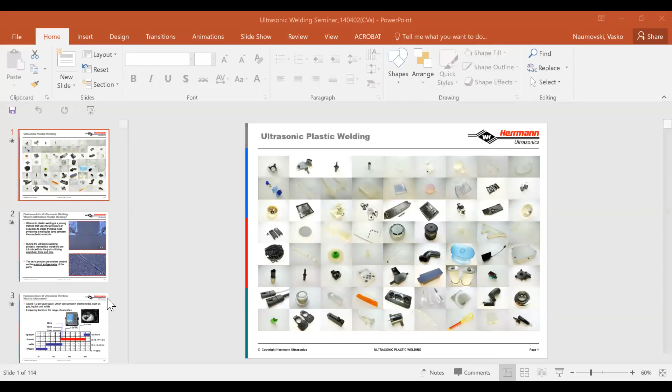As Ray mentioned, the newest division for Herrmann Ultrasonics is welding of metals, capitalizing on the trend we see in electric vehicles. We've introduced equipment that borrows the heart of our system, the generators and converters, the proven technology we have, and applied it to ultrasonic metal welding of the anodes and cathodes, the foils within a lithium-ion battery, or the battery management system, the high voltage cables that supply the motors in an electric vehicle.

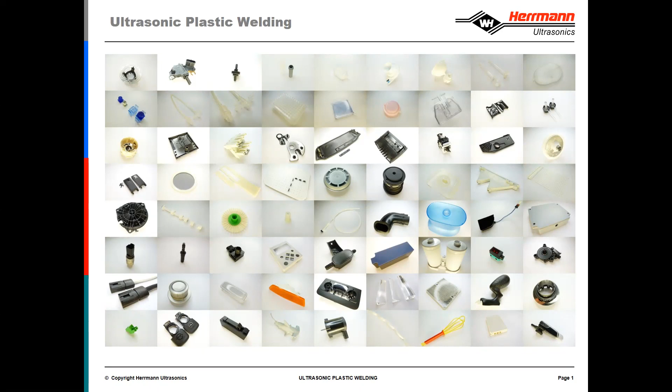As Ray said, that's kind of my job by day, and my job by night is mentoring some of the newer salespeople, traveling with them, viewing new applications, but also doing things like this customer outreach, where hopefully we can give you some additional information to make your lives and your jobs a little bit easier.

So this is the introductory class. This is a 1 hour segment of something that we typically do that lasts a full day. That class is typically held either at our headquarters in Bartlett or in one of our field office locations. We do have a lab in Lowell, Massachusetts with a machine there, so we've held this class there. The difference is that it's quite a bit more condensed, and it's divided up into 2 segments.

So this segment is the basics class. We'll be talking a little bit about the machine, a little bit about how the process works, what are some of the components, those kind of things. So let's jump right in, and I'll give you some definitions here.

Basically, the ultrasonic plastic welding process is a joining method that uses the principles of acoustics to create frictional heat, producing a molecular bond between thermoplastic parts. So down at the polymer level, at the molecular level, what we're looking to do is excite those polymer chains, break those polymer chains as the material melts, and then have them relink and rebond together with the other part so that it's an imperceivable joint that is seen.

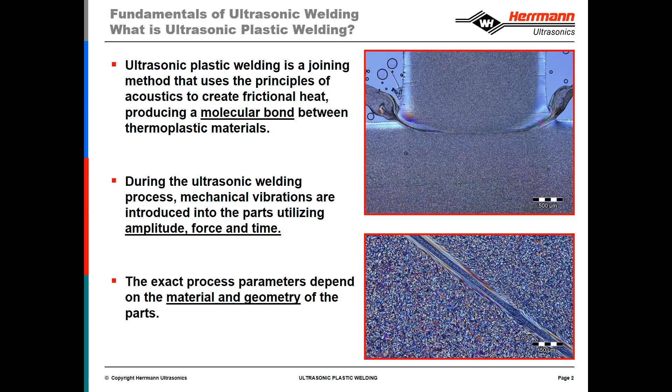And the exact process parameters depend on the material and the geometry of the parts. Larger parts typically take longer to weld, and depending on the material being welded, whether it's amorphous or semi-crystalline, or whether it's ABS or polypropylene, the type and amount of amplitude used is adjusted, again based on those 3 levers or knobs of amplitude, force, and time.

So sound is a pressure wave which can spread in elastic media such as gas, liquids, and solids. These are the frequency bands in the range of acoustics. We use 3 different frequencies: 20 kilohertz, 30 kilohertz, and 35 kilohertz.

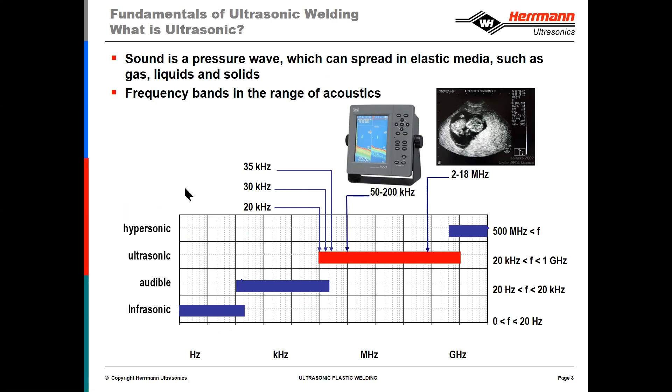But this slide also shows that the technology behind ultrasonics is used in a variety of different things. Anybody that has seen a sonogram of a child developing and his mother can relate to this. Bats use ultrasound to kind of hunt and find their prey. So it happens in nature, it happens in industry. There's a lot of different uses for ultrasonics.

There are basically two different ways of propagating a wave: it can either be transverse or longitudinal. An example of a transverse wave is if you drop a pebble into a pool or lake, you see the ripples undulate up and down and spread out, where the direction of propagation is perpendicular to the rock falling into the pool.

A longitudinal wave, on the other hand, has the direction of propagation and the direction of vibration coincide. An example is a sound wave. So when we create a longitudinal wave in the stack, the vibration is up and down. The stack, as applied to your plastic parts, acts like a mini jackhammer. It's not scrubbing the parts - it's as if you were clapping your hands. The effect produced is a micro jackhammer against those plastic parts.

As we've discussed, sound waves are mechanical longitudinal waves, and we split them up into lambda, or wavelengths. As the frequency goes up, the wavelength of sound traveling through titanium, our chosen material for the stack, goes down. So 35 kilohertz tools are shorter by nature than 20 kilohertz tools.

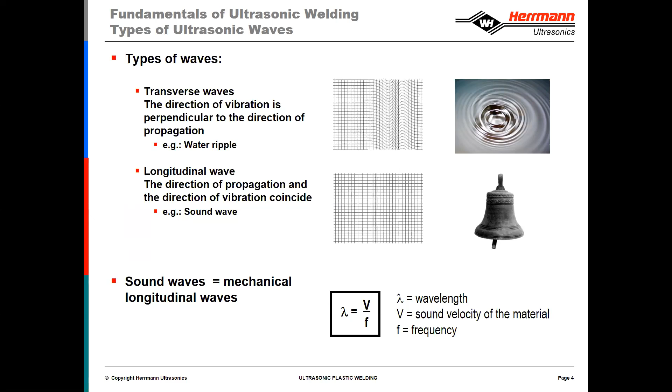So this micro jackhammering effect that we see, how big is it? A human hair is about 100 microns in diameter, and the typical amplitude we see - and I'd like to point out here it's zero to peak, so at rest to its maximum excursion - we typically see something in the range of 30 microns. It can be as high as 50 microns, but again we're talking about one third to one half the thickness of a human hair, so it's a very, very small amount of movement. It's vibrating 20,000, 30,000, or 35,000 times - very fast movements, but very small movements.

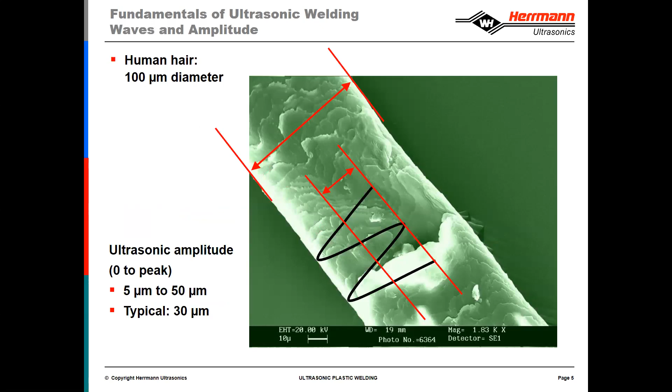So some additional definitions here. Amplitude is the zero to peak excursion of the Sonotrode face while in expansion. The Sonotrode contracts and expands, contracts and expands, so the amplitude we're measuring is from zero to peak. The definition of frequency is the number of cycles per unit of time - every time you see that excursion of peak to peak, that is the definition of frequency. So one hertz is one cycle per second.

In the case of 20 kilohertz, it's 20,000 cycles per second. Each of the components in the stack has what's known as a nodal point. So when it changes from rest to minimum excursion, to expansion, and back to contraction, it has to go back through that zero point.

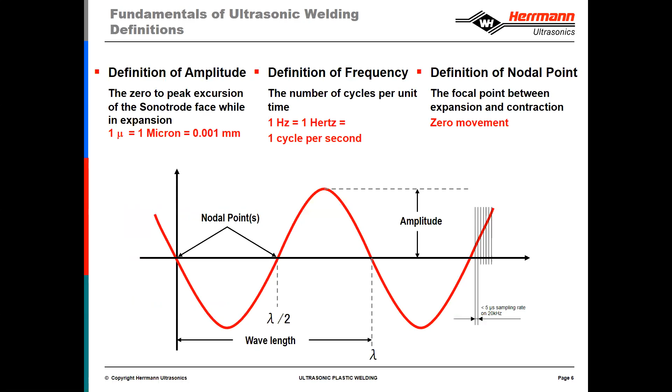So if I were to hold a rubber band between my fingers at the two ends and stretch it, you could hold the middle of the rubber band - that's the nodal point. That's where we mount the stack: hold the booster, hold the converter, and at times, if we need to, hold the Sonotrode. At the nodal point is where there's zero movement, and that's why we can hold and mount that tool within the actuator.

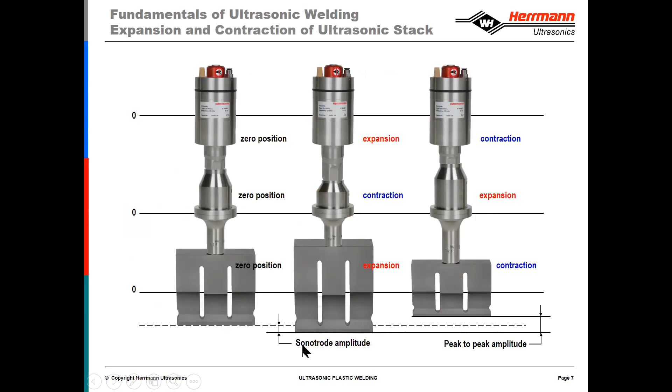Here's a graphical representation of the stack: we have the converter, the booster, and the Sonotrode, and the nodal points are here. As you can see, when it goes through this expansion and contraction cycle, it switches back and forth - in the case of 20 kilohertz, 20,000 times per second. When the Sonotrode is in expansion mode, the booster is in contraction mode, and the converter is in expansion mode - each component changes state from expansion to contraction. So although there is this peak to peak amplitude, in the contraction mode it's somewhat theoretical - we don't measure that. We only measure Sonotrode amplitude from zero to peak.

This is a pictorial representation of the welding cycle. We have our two parts, loaded into the fixture. The Sonotrode, stack, and actuator move down and make contact with the part. Typically there's a trigger force that you program based on the size of the part. Once the parts are squeezed together or loaded up with force, and the trigger happens, we start to vibrate. When we start to vibrate, this sacrificial bead - what we refer to as the energy director - begins to melt.

The actuator continues to push with a pre-programmed weld force, for some amount of time, distance, or energy and/or power. That's programmed in, and when that primary weld parameter is met, ultrasound turns off, and the welder switches to a hold time and corresponding hold force, which can also be profiled. At that point, the plastic is still molten. We continue to press until the plastic cools in the joint, then the Sonotrode moves up and you remove the welded part.

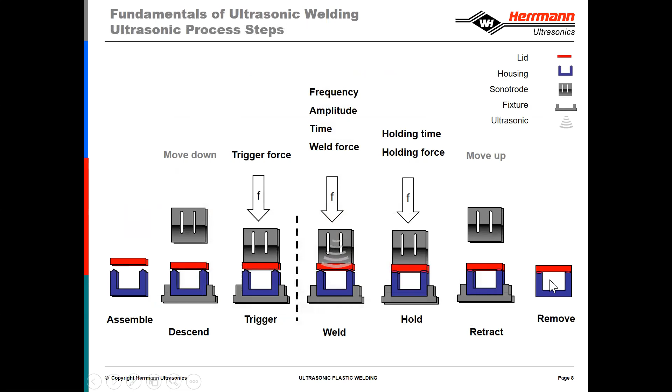This is a video of a luer fitting, a typical application that we weld. Before starting, note there's a gap here between the two parts. The upper part is the driven part, and the lower part, in the fixture, should remain motionless. The weld bead is approximately in this area.

What you'll see is a full speed cycle. The Sonotrode comes down, loads onto the parts, vibrates for a very short amount of time, 2 or 3 tenths of a second. Then you'll see a wetting of the area where the weld bead, energy director, or shear design is within the part—you'll see that melt, bond, and the Sonotrode retract.

So there's a full speed video, and then there'll be a video at half speed as well.

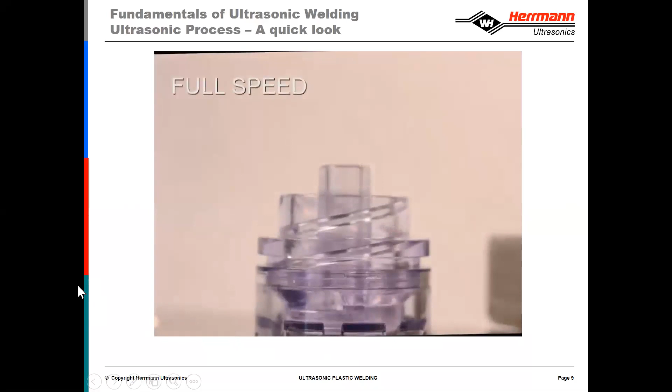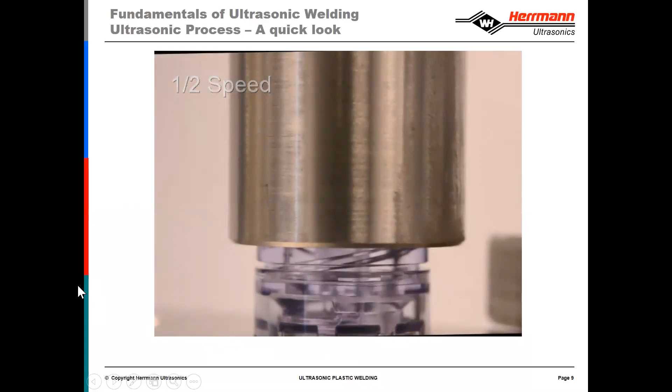There are various inputs and outputs into the machine. The main inputs in the startup phase are choosing the frequency to use, which is typically driven by the size of the part—larger parts use lower frequency, smaller parts use higher frequency. Then we choose the amplitude based upon the material being welded and the weld part design.

When we move to the next phase of setup, we have to adjust and align the tooling, and make sure the parts are manufactured consistently. Part-to-part and cavity-to-cavity variations can affect the setup. Then our input welding parameters—are we going to weld by collapse, by energy, or by an RPN? Then we weld the parts and get an output.

Typically there's a graph of weld process data, and we can do quality control on the welded part—a pull test, a leak test, whatever it might be—to determine if the part meets requirements. If it doesn't, we go back to our setup or input weld parameters and make adjustments to determine the exact recipe for the best part possible.

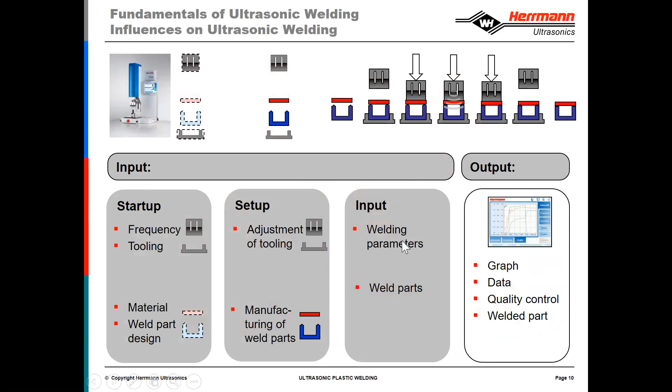We're aided by this data and graph, which has a joining velocity curve. That's our key guidance, our navigation system, that tells us what to adjust. We typically look for a linear joining velocity, and we adjust the weld parameters to influence that joining velocity curve so that it is linear.

Here's another video I'd like to show, using a high-speed camera that takes thousands of frames, 1,000 pictures per second. Here we have an energy director—this is the driven part, and this is the stationary part in the fixture. Because it's so high resolution and zoomed in, you'll actually see this part vibrate.

As it's vibrating, you'll see the energy director melt and the molten material flow. This is not an ideal weld joint design—there's no flash containment, so you'll see the flash get stringy and start to flow out here. I just wanted to show how the process looks at a microscopic level.

That energy director is essentially a sacrificial bead, as I call it. It's molded and designed into the plastic part, so that as the parts melt and collapse and come together, the final finished height of the part should be taken into consideration after the energy director is fully consumed.

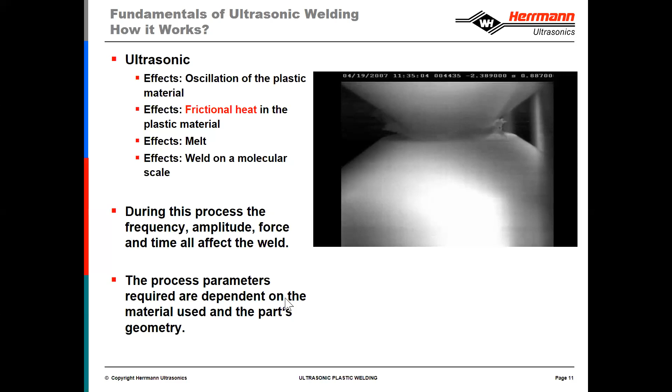It's important for us to get the right amount of heat into the plastic parts. If we don't have enough heat, we may still melt the energy director, and the parts may stick, but there's really not a homogeneous weld.

Initially, the crystallized solid part, as you heat it up, those molecules start to move around, get excited, the polymer chains break, and if they cool before we've reached the melting temperature of the materials again, you might get some sticking of the parts together, but there's not a true homogeneous mixing of the melt.

When we have the proper amplitude or proper heat that we introduce into the parts, we get this intermixing or molecular exchange of molecules between the parts, and therefore we get a true homogeneous bond.

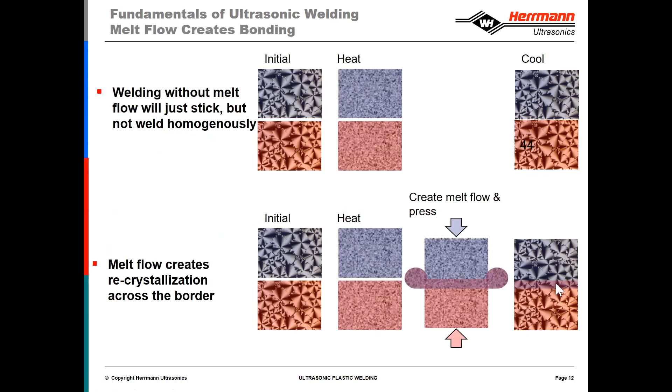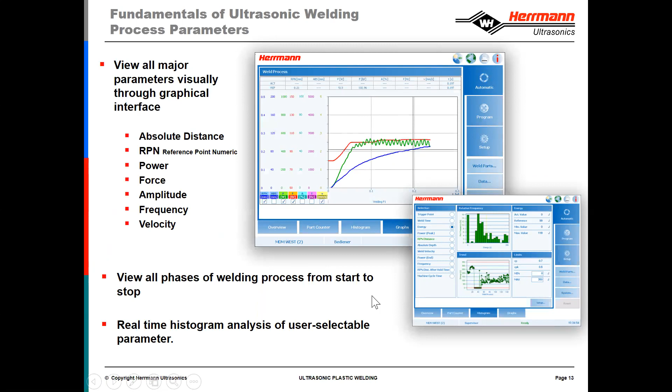We also have some quality control things that we can look at statistically to see how in control the process is.

So if you're making tens of thousands, hundreds of thousands, or millions of parts per year, we typically recommend a piece of automation be used for that application.

We have some applications where, in automation, the actuator is actually cam driven, and we've had cycles of up to 60 parts per minute. So again, depending on the volume of parts intended to be produced in a given amount of time—day, month, year, whatever it might be—take into consideration whether you need a manual workstation or whether you need to automate that process.

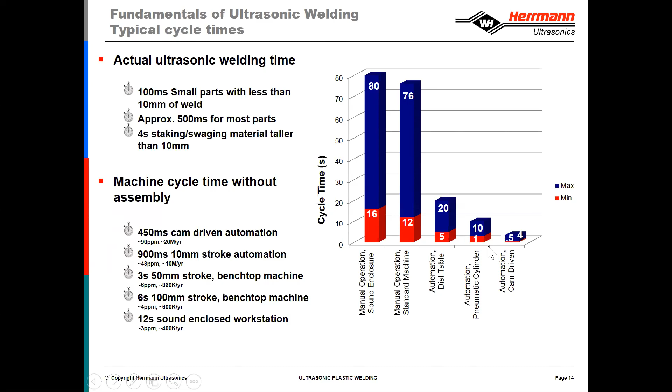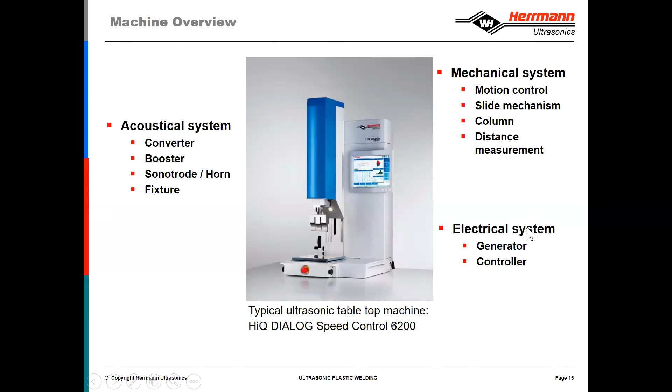Now we'll get into the subsystems within the welder. This is a picture of a benchtop machine. But whether it's a benchtop machine or an automated machine, the subsystems—the acoustical system, the mechanical system, the electrical system—are pretty much the same.

So in the acoustical subsystem, again, we have the stack, and I've been concentrating on that because that's really the most important component. So the converter, as its name implies, converts electrical energy into a mechanical vibration, and we'll get into the specifics there in just a little bit.

The booster amplifies that mechanical vibration, and then the Sonotrode is custom to the application, and then that makes contact with the plastic parts. The analogy we like to use is the drivetrain in your car. The engine is the converter, just like the engine in your car takes air and fuel and spark and creates torque or a rotational movement.

The converter, again, takes electrical energy and converts it to a mechanical vibration. Analogous to the transmission, the booster has different ratios or different gears, if you will, depending on the material that is chosen. So just like in your car, a specific gear is used for a specific speed. A booster or different ratio of boosters is used to amplify the mechanical vibrations.

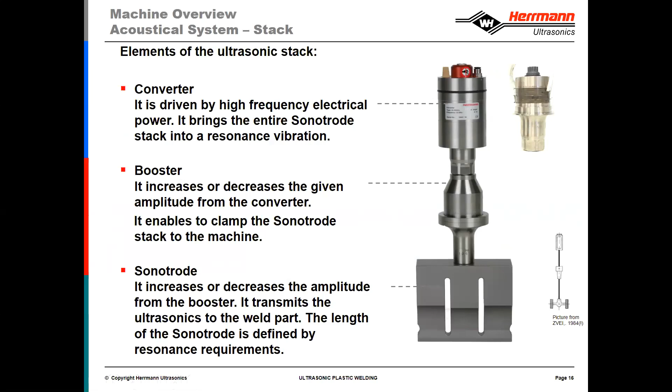And then, as the analogy finalizes, the tires, or where the rubber meets the road, the Sonotrode is custom and has to really grip the part and couple with it. So theoretically, the part and the Sonotrode couple and move together, and then the stationary part, the part that's in the fixture, remains motionless.

So this graphical representation is using our finite element analysis, or our modeling. Obviously, it's greatly slowed down and greatly exaggerated, but you can see this longitudinal vibration. So the direction of propagation, the up and down, this micro jackhammering that we need, is like you were to clap your hands together, not scrub your hands together. We can see the nodal points.

And then we can see that in this case, we're measuring peak to peak, but the output of the converter is 10.5 microns, 21, 22 peak to peak. And then the booster, because of the nature of its design, above the nodal point we have the driving mass, and below the nodal point we have the driven mass. You can see that there's a discrepancy. The driving mass is larger than the driven mass. And so therefore, more amplitude is created at the face than was inputted to the back.

So from 22, we go to 55 microns. It's not visible here, but if we were to turn the Sonotrode 90 degrees, you would see that again, the driving mass above the nodal point is larger than the driven mass below the nodal point. So again, we have a gain ratio. The amount of mass above is larger than the mass below. So therefore, we go from 55 microns of peak-to-peak input to 88 microns of output, or conversely, 44 microns of zero to peak.

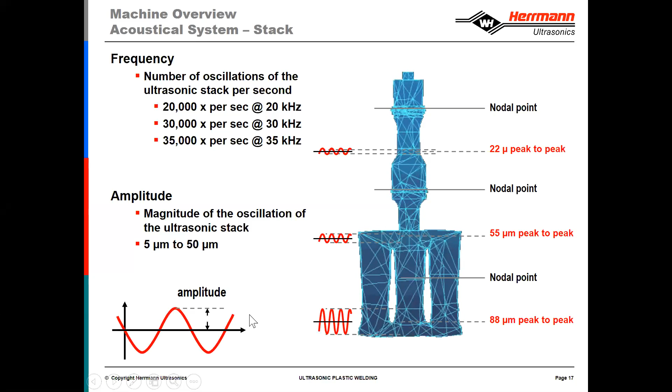So how does the converter generate this mechanical vibration? It uses the piezoelectric effect, and basically the ceramic discs that are in the converters for the converter stack, 20 kilohertz converter, 35 kilohertz converter, but they're essentially the same, piezoelectric ceramics here, with electrical leads coming in. So when we excite them electrically, they expand and contract, they vibrate mechanically.

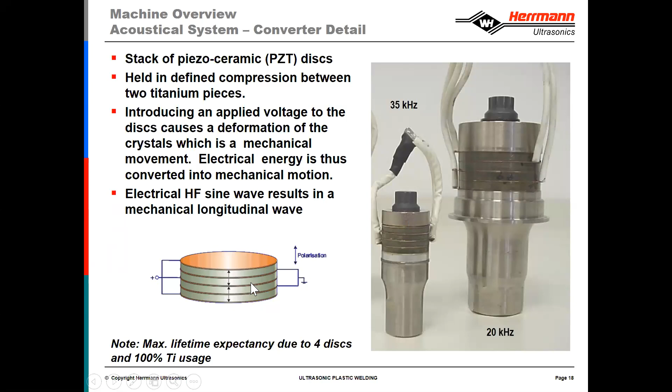So as I mentioned, the booster, by nature of its mass above the nodal point and below the nodal point, creates what we call a gain ratio. So the input vibrations are typically smaller in the back and larger in the front. And each of the boosters has etched into it the ratio. So in this case, this booster, for 1 micron of input, outputs 2.5 microns.

We do from time to time require a reduction in gain, so we see that we have reducing ratio boosters in both 20 and 35 kilohertz, but more often than not, more common is to see increasing gain. So in 20 kilohertz, we have ratios of 1 1/4, 1 1/2, 2, 2 1/2, and 3. In 35 kilohertz, we have ratios of 1 1/4, 1 1/2, 2, and 2 1/2.

In setting up a process for our customers, we are essentially responsible for picking the right booster. The reason we're training or teaching about this is that sometime down the line, you may change your material or something else may change in the process. So how do you get the process back into control, or how do you get the output to meet your requirements? More often than not, it's a change in amplitude that will affect how the parts are welded.

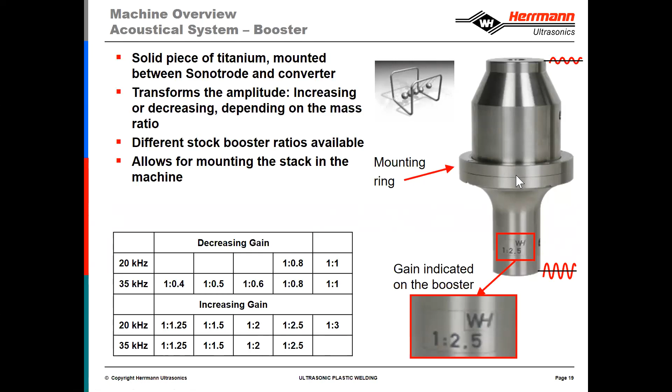Sometimes what happens is if a customer disassembles the stack, or if they have to change applications and remove the Sonotrode to put a different one on, more often than not they don't torque it high enough or well enough. These torque specs are relatively high. For those of you with other machines, you may have experienced putting some sort of anti-seize or a mylar washer between those components. We manufacture our components to a higher flatness and surface specification, so we don't apply any lubricant between the stack components, and we don't place any mylar washers in between. Clean, flat, dry, and torque to a higher specification.

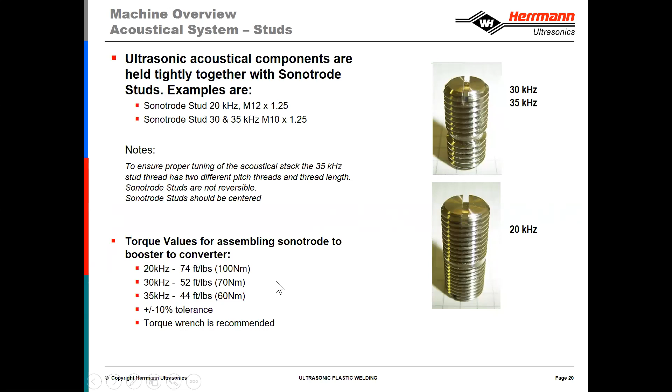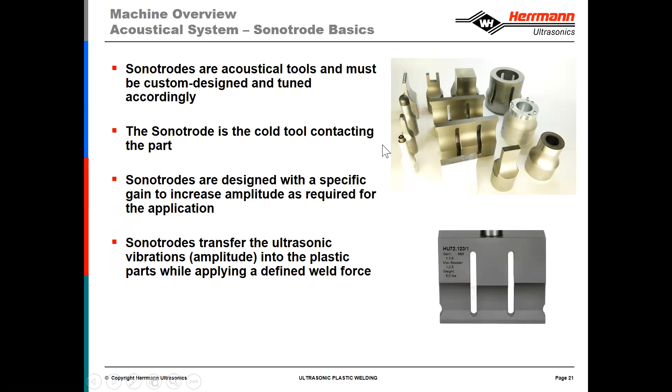A 20 kilohertz Sonotrode is about 5 inches long. So when a Sonotrode becomes wider than it is long, the vibrations don't know whether they're supposed to be going up and down or at an angle, transversely. So these slots are added in very specific locations—very specific in their width, and very specific in the location from the back of the Sonotrode to the front of the Sonotrode. All this goes into the tuning aspect of the tool, because it has to vibrate very precisely at 20 kilohertz. So again, these slots are put into larger Sonotrodes that are wider than they are long.

The different materials we typically use are either titanium, aluminum, or steel. I'd say about 75 to 80% of the tools we make are titanium, and then the other 10% in aluminum and 10% in steel, plus or minus. Titanium has the best mix of strength and elasticity. Aluminum is very soft, so it can have more amplitude or be stretched more than titanium; however, because it's softer, it can wear out faster as well.

On the other end of the equation is CPM steel. If you have a glass-filled nylon, for example, we've seen applications of glass-filled nylon up to as much as 30% glass fill. The glass fill is abrasive, so the tool can wear—the Sonotrode is making contact with that plastic part 20, 30, 35,000 times per second. So just as if you were to beat on something multiple times, it'll deform, it'll wear, it'll change.

So we choose the material of the Sonotrode depending upon the material of the plastic part to be welded. Furthermore, we can add coatings such as hard coat anodize on aluminum tools, tungsten carbide on titanium, or chrome plating. We've used diamond coating, we've used nickel Teflon. There's a variety of different coatings we can customize to apply to the face of the Sonotrode to minimize wear or to affect the aesthetics so that blemishes are minimized on the plastic parts.

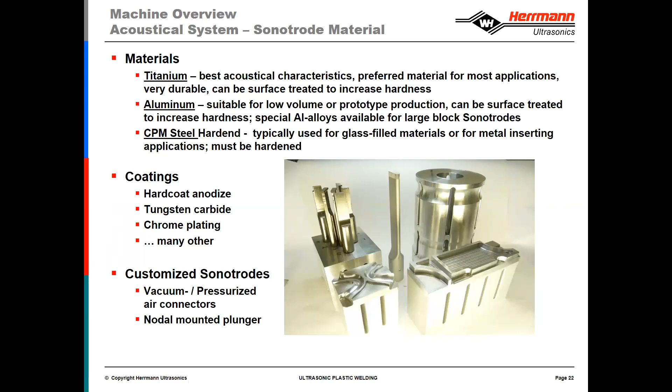And then furthermore, and not so common, we can add vacuum to a Sonotrode, or a nodal mounted plunger. For these types of applications—if you had a component like a membrane, a filter, or a valve, maybe something that has to be pushed out of the way of the parts welding prior to welding—these components are added to the Sonotrode to assist or help in that type of application.

Each of the Sonotrodes that we manufacture has a label like this, laser etched into it. It has the Sonotrode serial number that uniquely identifies that tool.

And when we manufacture a Sonotrode, every drawing and every quality control document is stored. So if you need a replacement, we can make an identical replacement to be used if your tool wears or breaks or something else were to happen to it.

I can't stress enough that because these tools are custom, having a spare in your facility is of utmost importance. It's really an insurance policy, because if the tool were to break or wear, they do take several weeks for us to produce. If you can tolerate that amount of downtime, then maybe you don't need the insurance policy, but most customers we find can't really be down for more than a couple days. So having a spare is really very critical.

The gain ratio of the Sonotrode is etched into it, the maximum booster that we suggest you use, and the weight is also etched into it.

Typically, we try to match the gain of the booster and the gain of the Sonotrode. We try to evenly distribute that gain ratio, because you don't want one component to be stretched harder than the other. Gain and stress are directly linked, so the higher the gain, the higher the stress. The more you stretch the booster, the more you stretch the Sonotrode. It's like a spring. Eventually that spring doesn't go back to its natural state, and so the Sonotrodes will fail.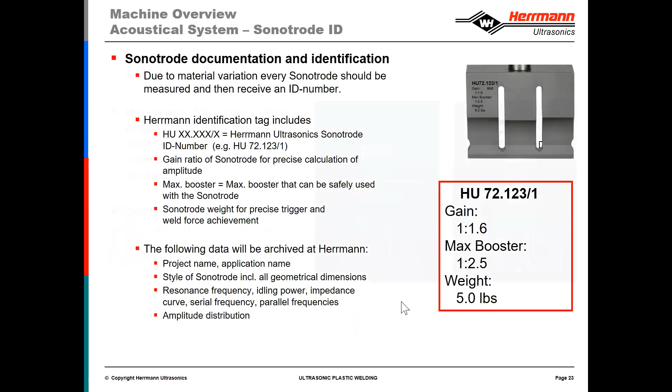Something else that the finite element analysis helps us do is eliminate those parasitic frequencies that I mentioned earlier. A Sonotrode will typically have 2, 3, or 4 different frequencies that it wants to resonate at, and it's up to our tooling designers to pick the right frequency and tune the Sonotrode so that it vibrates in this longitudinal mode.

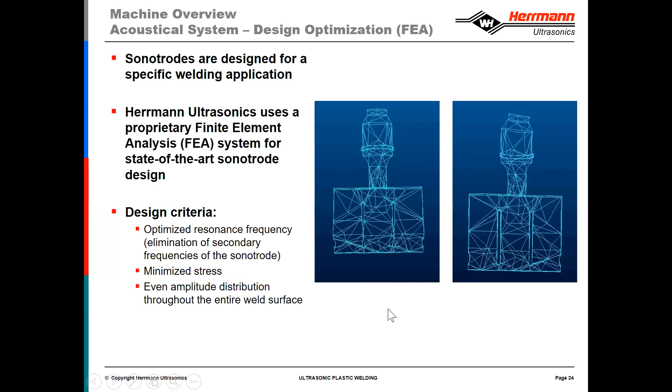Just a small point on fixturing as we're wrapping up here. They're often overlooked, but are very important. The part that's in the fixture should be held motionless. We want that relative motion to be created between the parts. So if the part in the fixture is resonating or moving, and we're not creating that relative motion between the two parts, then energy is lost, and it's not going into the plastic parts to be welded.

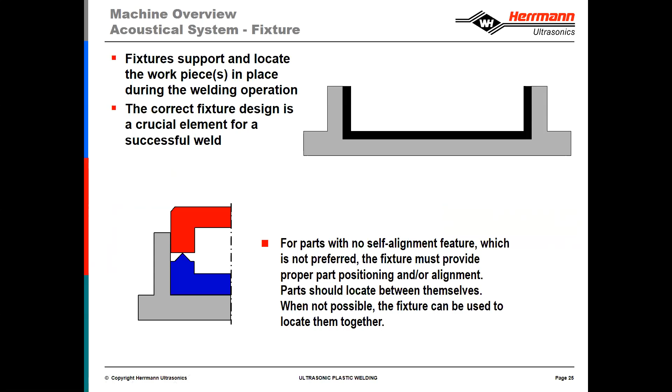You may feel heat at the face of the Sonotrode. You may even feel heat in the fixture. But typically we want the part within the fixture to be very rigidly held so that it does not move during the welding process. We make our fixtures out of aluminum, steel.

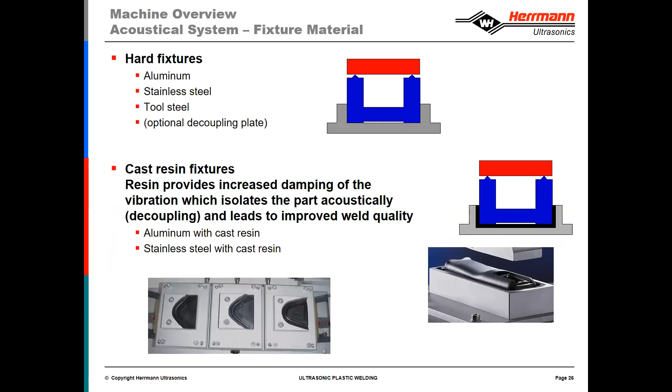There may be a decoupling plate that's added. We can also make some prototype fixtures out of cast resin, although this is not as common anymore. With the increasing ability to CNC mill fixtures, we can really make a cavity or very closely match the part with our CNC machining of hard fixtures, and we typically don't have to cast resin for fixtures any longer.

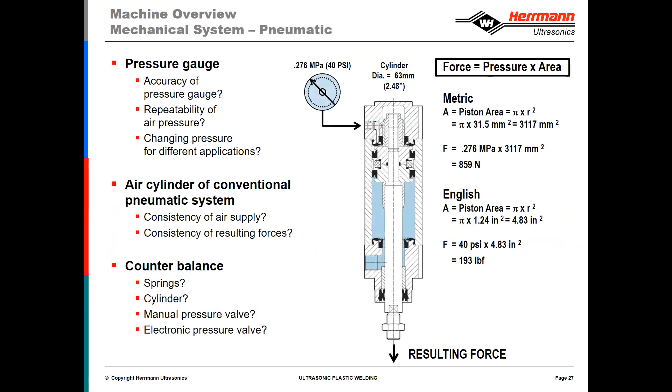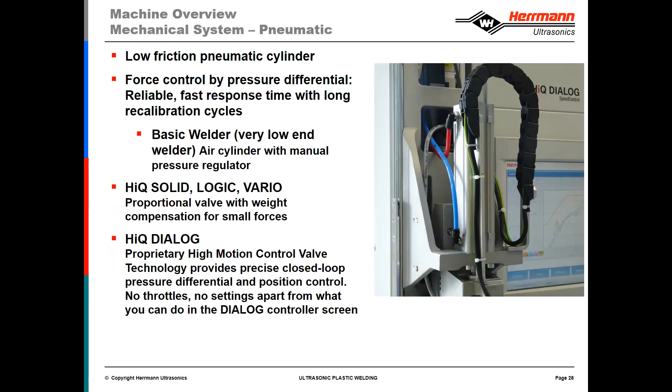The other thing we consider is the friction of the slide mechanism against the carriage. We have some low force machines with very low friction guide rails. Depending on the size of your part, the amount of force applied is critical, so the kind of machine chosen and its force range is something we will help select and recommend to our customers. We have different cylinder ranges and guide rail ranges specific to the size of your part.

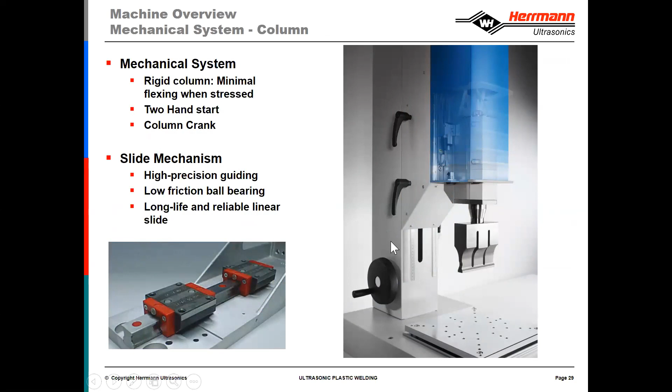Here I'd like to point out the rigidity of the column. You can see the column itself is cast and square. In high force applications, when the Sonotrode or stack and carriage come down and apply force, think of it as a big C-frame or C-clamp. If you push down with high force, the natural tendency of the actuator would be to deflect. So if you have a large part or need higher forces, the rigidity of the system and lack of deflection must be taken into consideration.

There is an encoder within the machine that very precisely measures distance. So if we have an energy director that is fractions of a millimeter, 0.2 or 0.3 of a millimeter, we have to very precisely measure the amount of collapse, and that's what the encoder does.

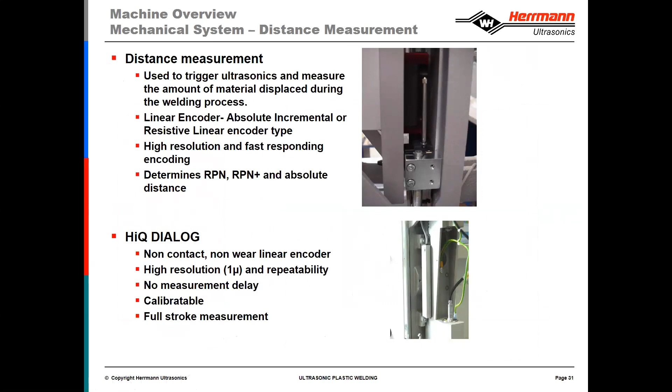Then there's our trigger point detection. We typically set a range, maximum and minimum, of where the welder should encounter the part. If you have part variations or the part is misloaded, the welder does not blindly go through and start the weld—parts have to be properly loaded and found by the Sonotrode. Once the Sonotrode finds the top of the part, comes to rest, and is within this trigger window, only then will the encoder be zeroed and welding starts, continuing until your primary weld parameter is met, whether that's collapse distance, energy, or power. It all starts with this triggering algorithm for finding the top of the part.

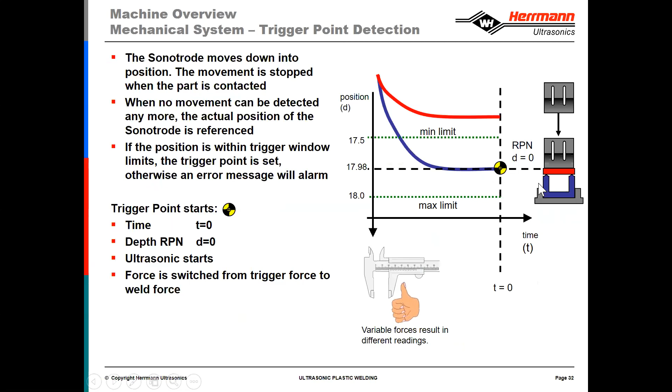The generator is responsible for taking electrical energy from the wall, amplifying it to very high voltage and high frequency, and outputting it to the converter. If you find yourself in between boosters, or have a very specific amplitude requirement, the generator can minutely adjust by 1 percentage point to lower the amplitude. In these situations, we typically recommend using the higher booster and then choking or throttling back the amplitude within the generator.

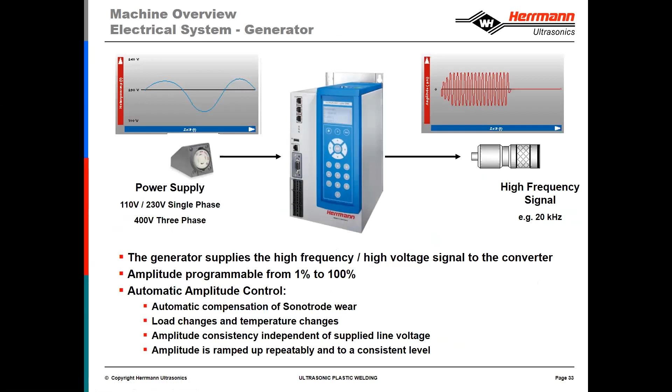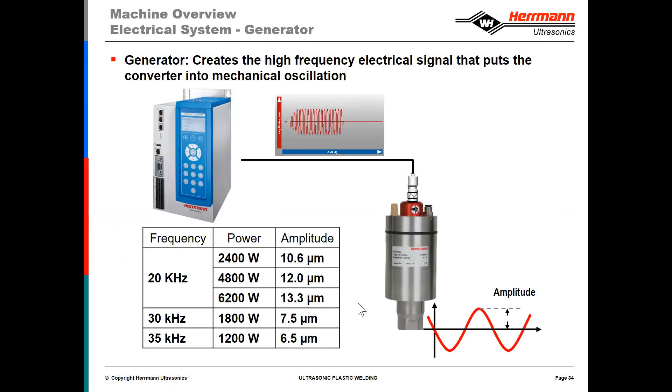Converters output more amplitude depending on the power level of the generator. For very large parts, higher wattage is required, but typically higher amplitude is required as well. So for very large parts, it's not uncommon for us to recommend or use a larger generator or power supply.

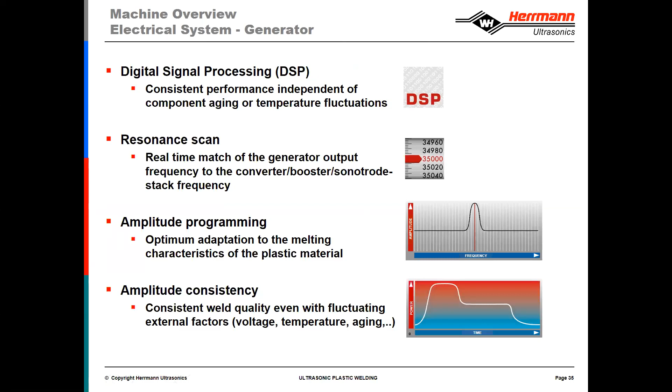The generator has a digital signal processor, which together with the resonance scan, we recommend running once the stack is placed within the machine. The generator will match the output frequency of the stack and track it throughout the cycle, because as it's loaded onto the part, the frequency can shift a little. As it wears, heats up, or conditions change over time, the generator continues to match the frequency and adjust so the tooling operates at an optimal point.

The way we calculate amplitude: since the output at the face of the various components increases, we have to multiply the output of the converter by the booster, multiplied by the gain of the Sonotrode, and then multiplied by the percentage within the generator. So in this case, using a 20 kilohertz generator with a 2 kilowatt power output at 10.6 microns, times the booster ratio of 1 to 2, times the Sonotrode gain ratio of 1 to 2, with the generator set to 80% amplitude: 10.6 times 2 for the booster, times 2 for the Sonotrode, times 0.8 for the generator, gives an amplitude output in this case of 33.9.

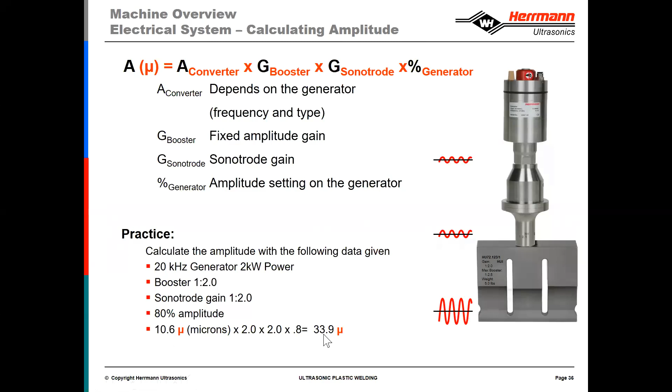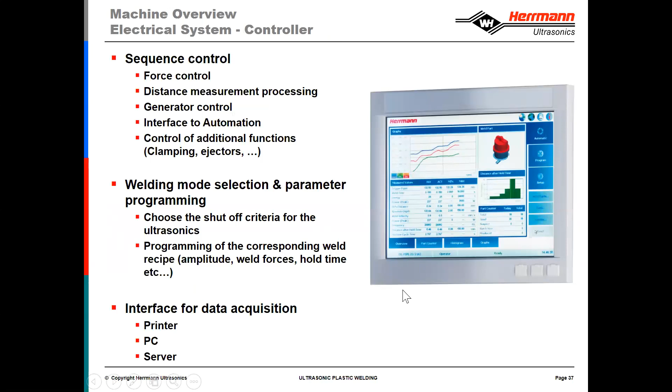Finally, the controller is a very important user interface. It shows you the graph here, the output parameters or the data for each of the individual parts that were welded, and then also some histograms of the weld process over time. So really what's quite important is that we can visualize the process within this graph. And again, the blue line is the joining velocity curve.

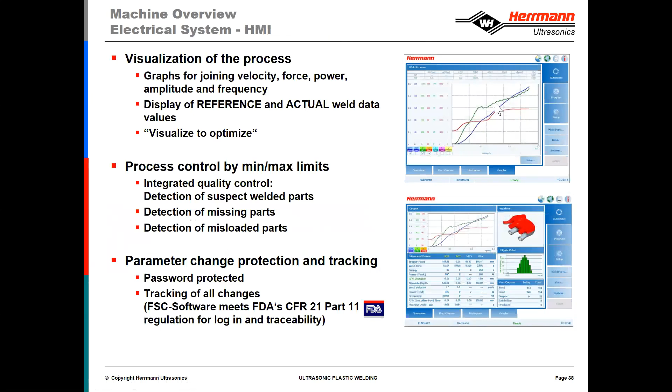Here you can see that the force profile is a bit optimized. So the discrepancy between trigger force, weld force 1, and weld force 2, an increasing profile of force, influences that joining velocity. And as we apply more force, we also see that the power, the green line, also increases. So the harder you squeeze or the more you push on the parts, the more power that's also drawn from the generator.

Okay, so that concludes the basics course. Ray, I guess if we have a few minutes here, maybe we will run over a little bit, but I'd like to open it up to any questions that folks might have.

Yeah, as a matter of fact, we've expanded on the last time we've been doing this, trying to get a little bit better. Bosco, I want to let you know that I already conducted a bit of a survey on the presentation and the details, got some feedback, and a good majority of them got back, and they're all 9s and 10s, man. You are it. Great, thank you.

I do have a couple of questions that came through on the chat. The first one: how is the variation in bonding strength from part to part using ultrasonics? I didn't want to answer it because I think there might be some variables there that you might want to address. So that's the question. Do you have an answer for that?

Sure. So the variability of the welding process is directly tied to the consistency of the molded parts. Ideally, if you have a single cavity mold for part A and a single cavity mold for part B, then the consistency should be 100%, the same from weld to weld. If you have a multi-cavity mold, or variability in the molding process, that will typically be seen within the weld process. We do have tools at our discretion to choose the right process parameter—it might be energy, it might be distance—but oftentimes we choose distance as our primary weld parameter, driven by the height of the energy director. So as long as the height of the energy director stays the same, the welder will adjust the amount of power and time that goes into the weld to accommodate those variables you might see in molding.